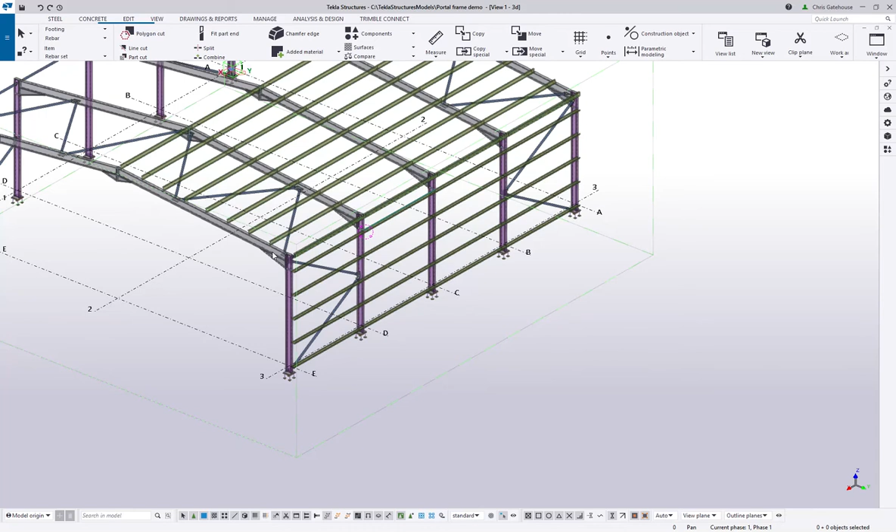When it comes to the cold roll components, I like to make life simple for myself. You'll remember that when we were doing the main portal spans, we detailed one bay and then copied them down. I like to do a similar thing with the purlins and the side rails.

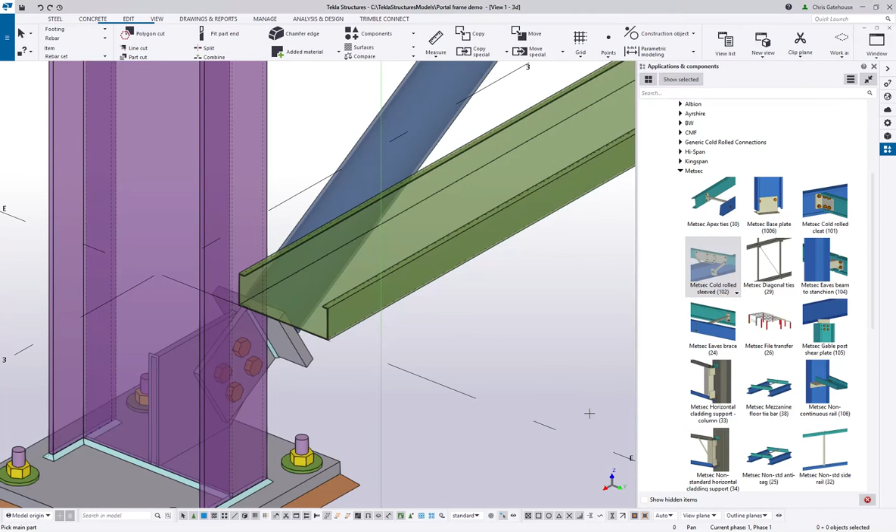So I will remove all but one row of the side rails, and just detail this one level. Go to the library, and under the steel specialized tools under cold roll systems, we have the Metsec library. There are a lot of other cold roll manufacturers available, so it's down to your preference, but they all behave in a very similar way. So we'll load in the default parameters for that component, pick the column, pick the rail, middle button to complete, and you can see we've got a cleat, a weld, all the sorts of things you expect to find with a component.

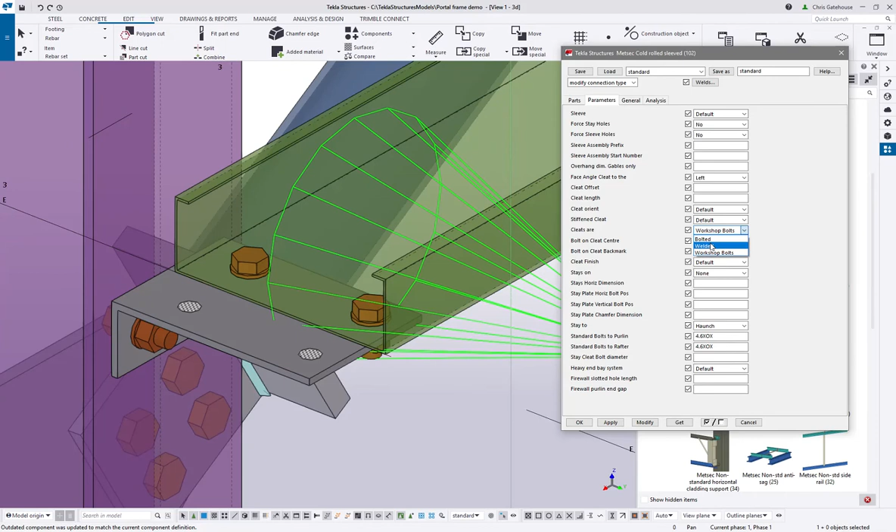If I double click here, it brings up the dialog box. The first thing is this cleat - you'll notice that's a Metsec off-the-shelf welded cleat. We can change those cleats to bolted, and you'll see we get a Metsec bolted type cleat. Or if we change it back to welded, we can change the profile. If you prefer to make your own cleats, if we change that specification to a 10 thick flat by 130 wide, we'll get a 10 by 130 flat. That's how I'm going to leave it, but how you make the cleats is up to you.

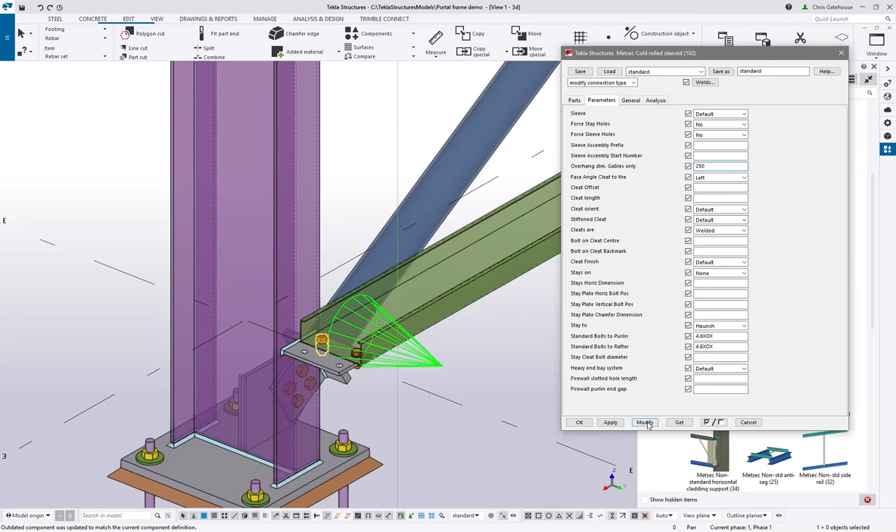The other thing you can do with the gable end is specify a gable end projection. So if we go into overhang dim gables only, specify a projection of 250 mil, that will project the end rails 250 past the center of the column. Now we can store that as our spec.

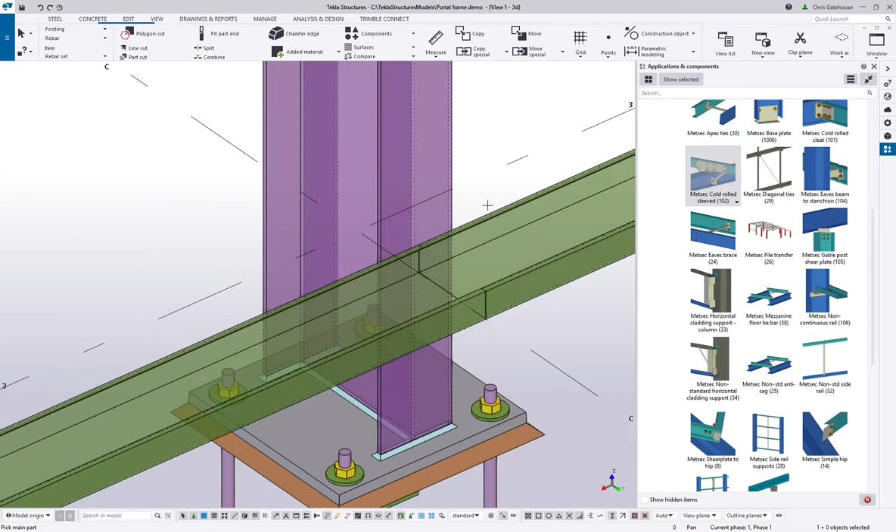We can go down this row of rails and put it in. You'll notice here that where I pick two rails, it's going to put the sleeve on automatically. These components tend to comply to manufacturer's literature as much as possible, so the fewer inputs you put into it, the better the results will be.

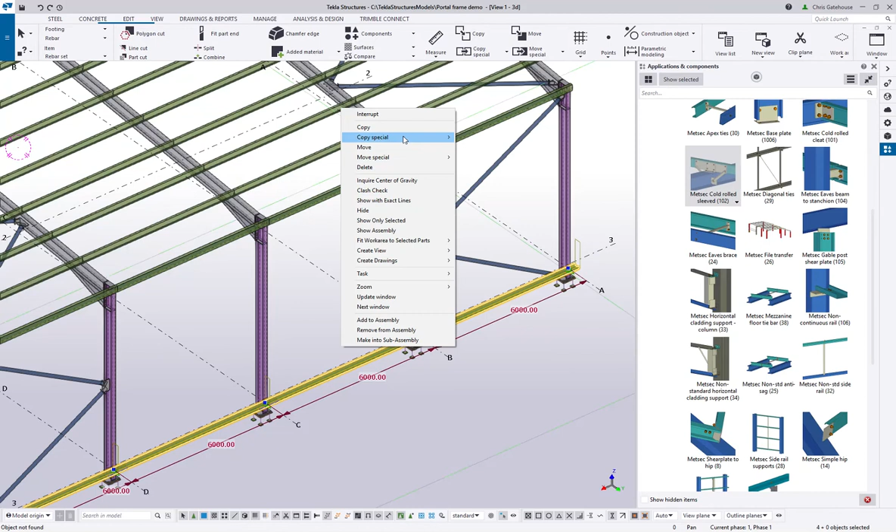So I'm just going to run down this elevation and complete those components. Again, you'll see the gable overhang has been detected, the 250 projection has been placed. I can select all those rails now that the connections are done, and use the copy special linear command, copy vertically 1500 spacing, 4 times. So that's that elevation of cold roll detailed.

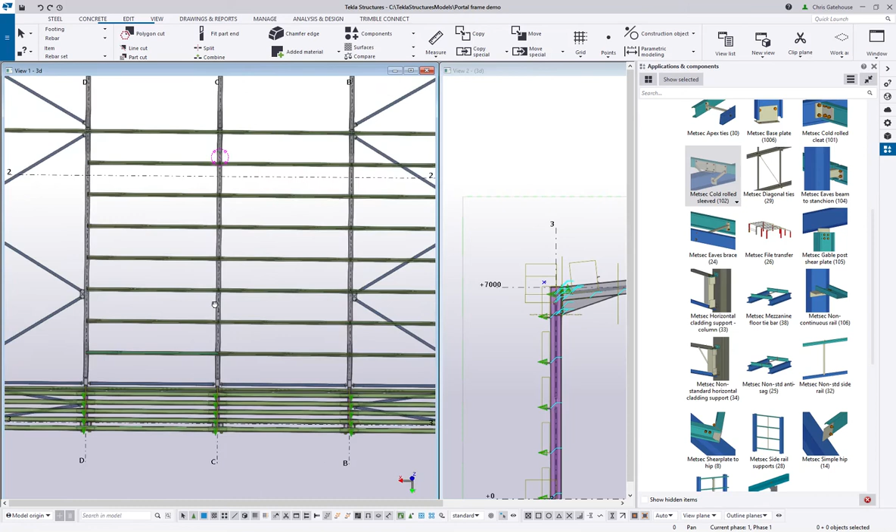Again, I can do the same thing with the purlins. So if I remove all the purlins and just leave one row - I can do it by window selection too, select all of those, delete them. So we've got one row of purlins. Let's detail those fully and then we can copy it down. We're just going to use the same component - it's a very versatile component for cold rolled.

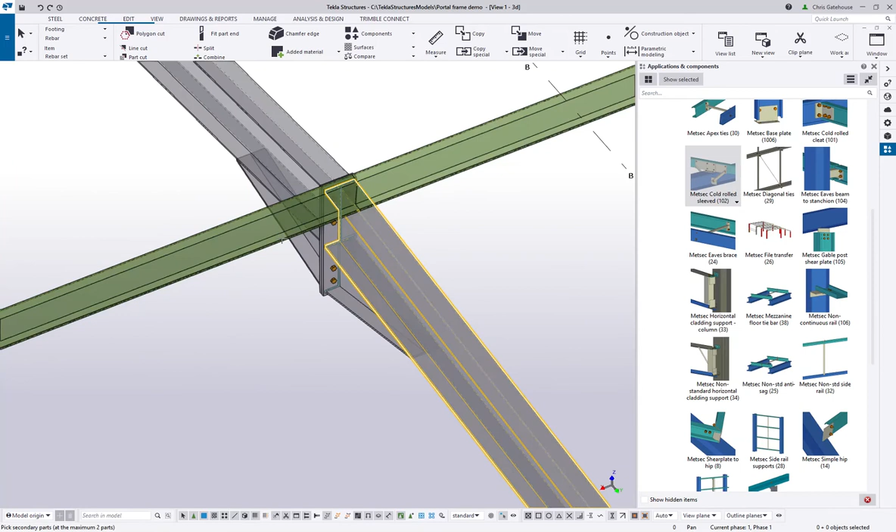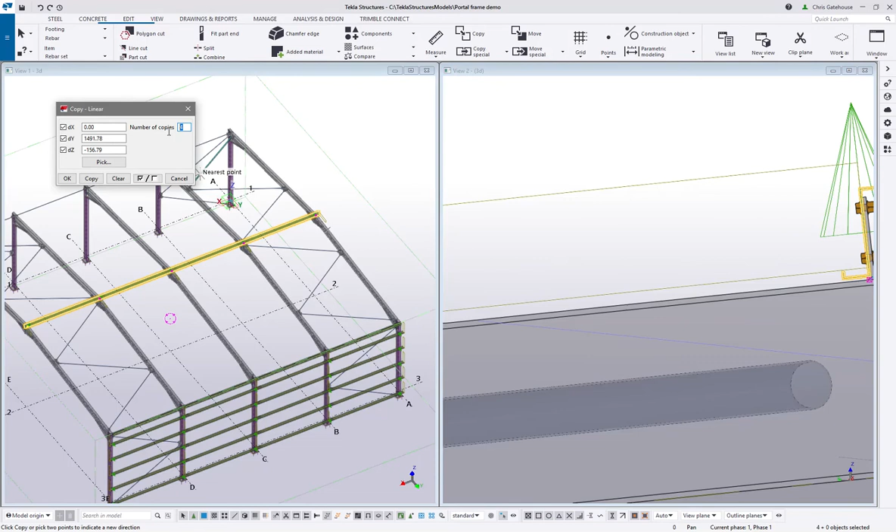There we go, you see the sleeve going in again. And then the gable. Again, I need to copy this back down the slope, so I'm going to select all 4 purlins. Copy special linear command, first point, then the vector, then the spacing - this time spacing was 1500, and this time I'm going to make 8 copies.

We've probably got one too many. So let's get rid of that row of purlins. Okay, wonderful - you can see we've got all of the connections.

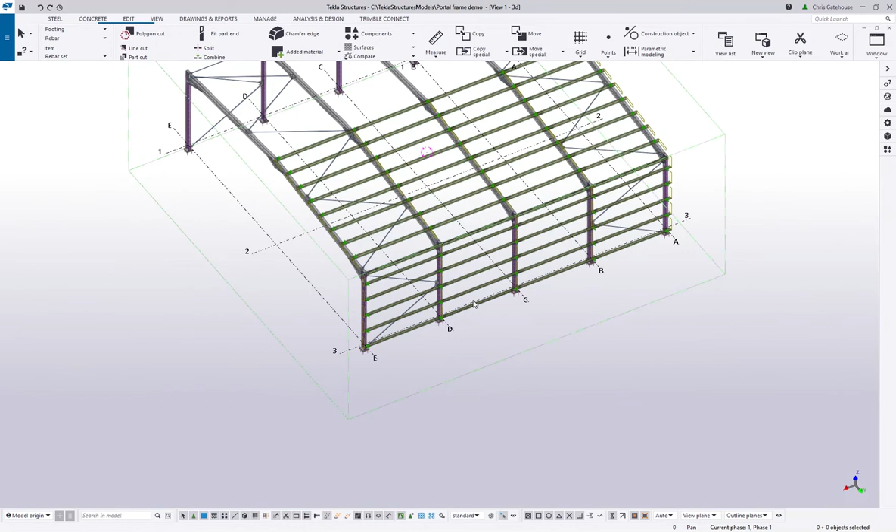Now, often with cold rolled systems, you'll need to brace them with stays. You can manage that within this component - again, sort of hinting at its flexibility, its versatility. So I can put stays on these components as well.

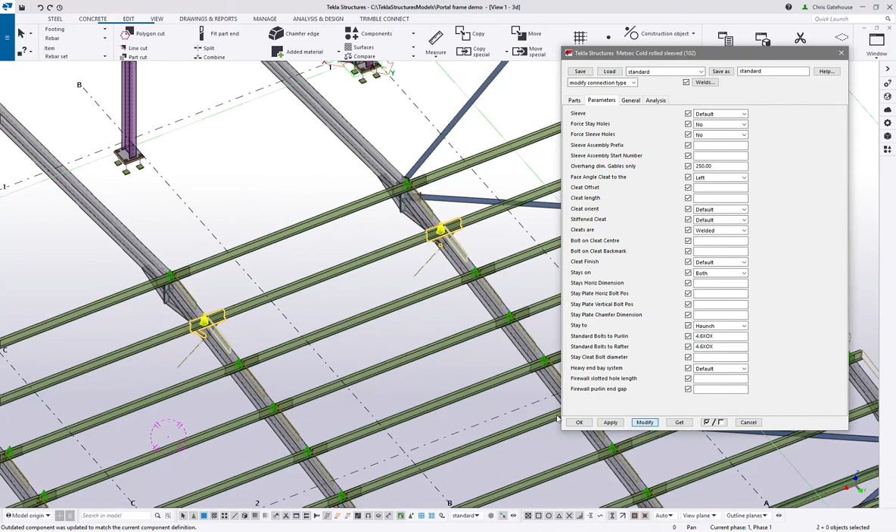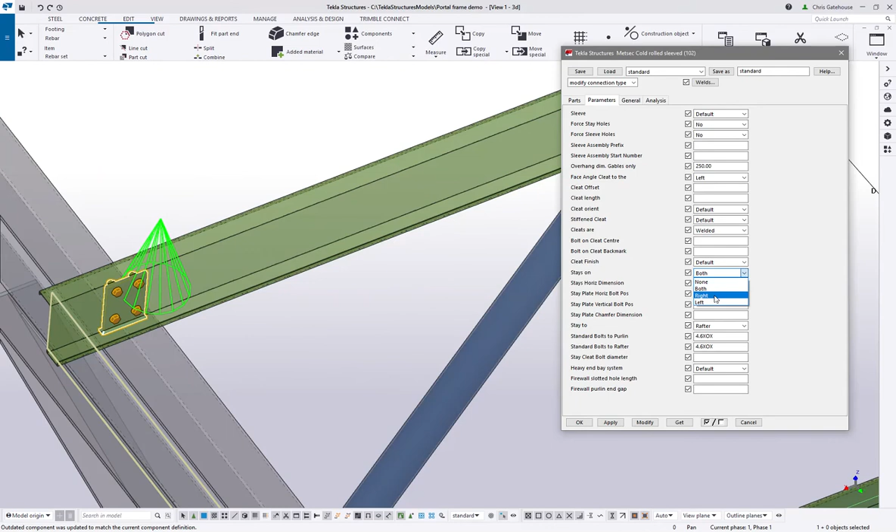I can just reproduce that down this row, and I can generally get them at the end of the haunch as well, so I can select those and do it there. That's going to the haunch by default, but I can change that so it goes to the rafter instead. We'll pop one on the end as well - that one is going on the left side. Is that going to the haunch or the rafter? No, the rafter, good. And then this one will be on the right hand side.

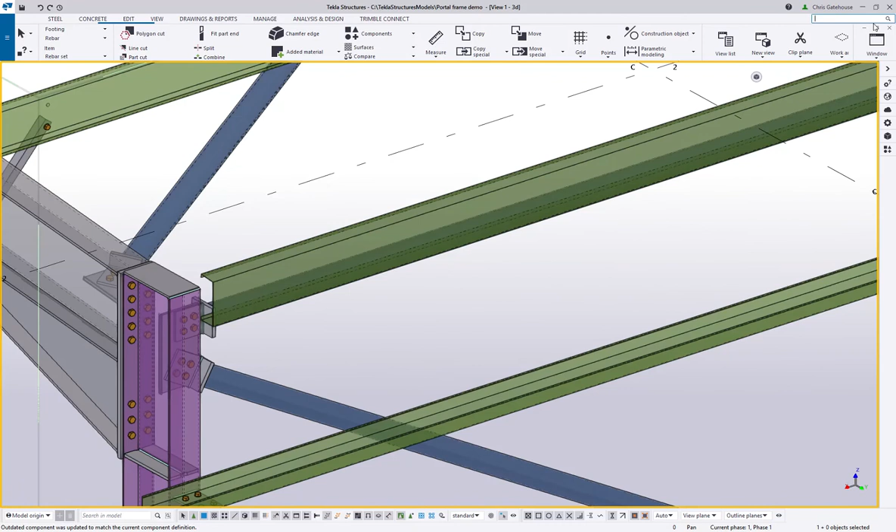Next, we will look at the eaves beams. As I said before, the column probably doesn't project enough to form a decent connection, so let's find which column that is.

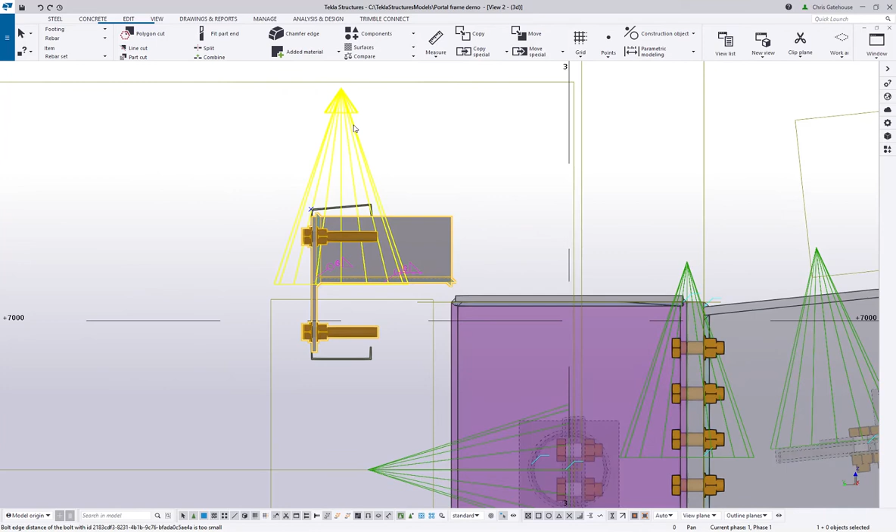Let's go to the component and form a Metsec eaves beam connection there. And you can see, yeah, as I suspected, it's not projecting up enough. So we can take care of that. First, let's configure this connection.

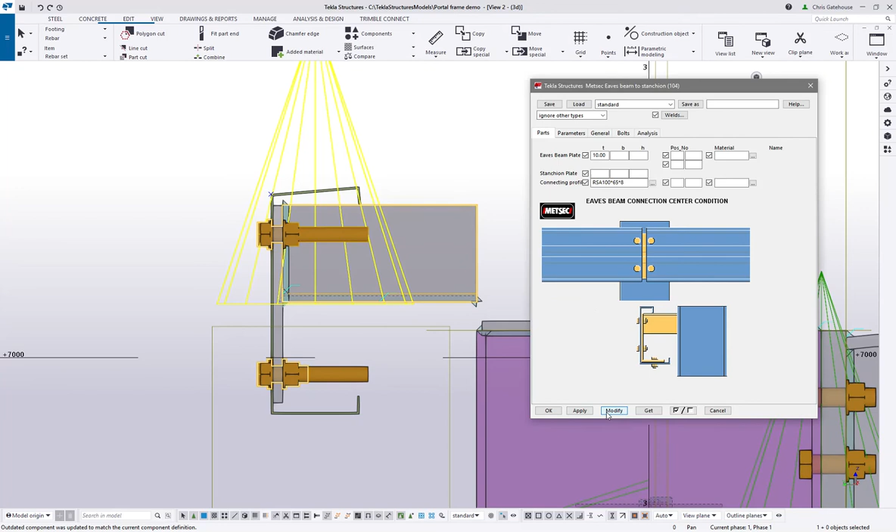So the eaves beam plate should be 10 thick. Let's go for that. The connecting profile we'll leave as an angle, but we can pick it out of the library, so let's go into our RSAs and say it's a 100 by 65 by 8 profile. Let's go to here, let's say that's okay, we're happy with that. Okay, that's fine. Yep, good with that, happy with all of that.

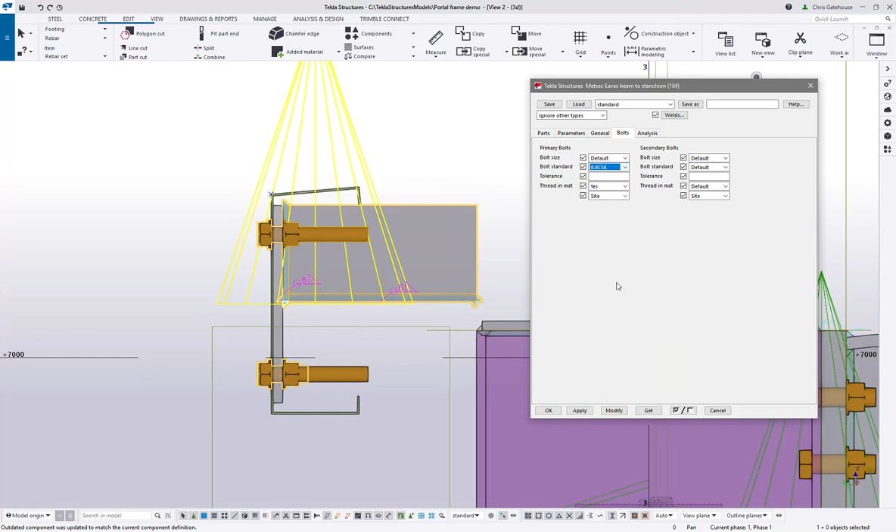Let's change the bolts to countersunk. So 8.8 countersunk bolts like so, and you'll see that the packer plate has been included automatically. Let's just take a 3D view of that. Now that leg passes over the leg, that's good.

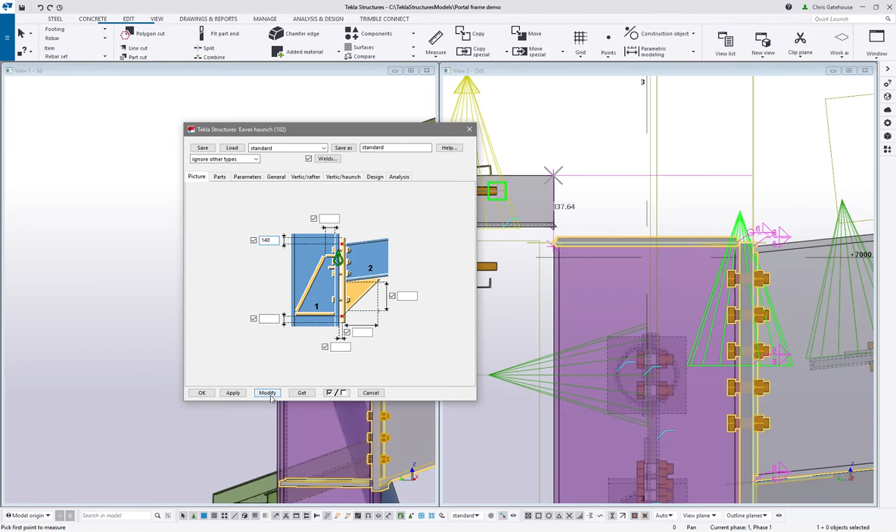So what we can do with this eaves component now to make the column projection suitable for the connection is project the top of the column above the rafter. If we take a quick measurement from there to the top of that, we can see that's 140 mil there or thereabouts, and we can project it above to make sure we've got enough profile to weld to.

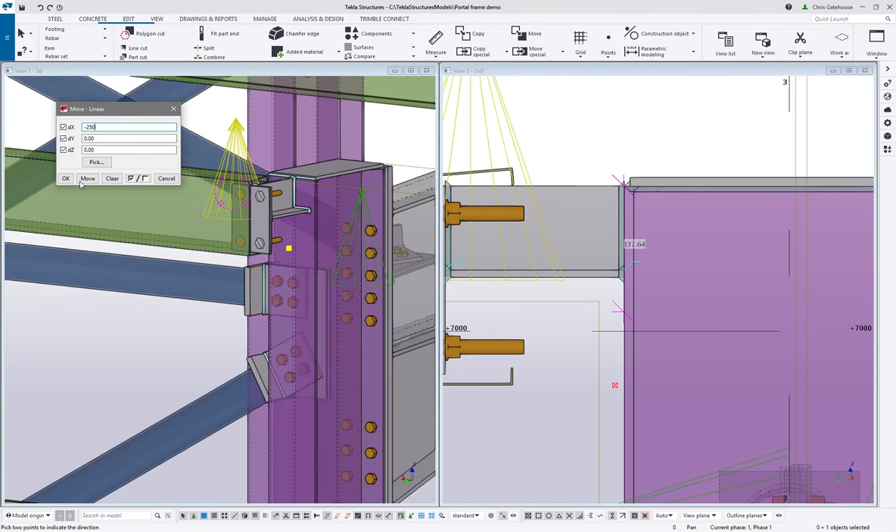The other thing we're missing here is the gable overhang, which you can't control within the component, but it's very straightforward. Take this point and we can move that in the X plane 250 mil out, like so, just to get that component to comply, and we'll move that other end 250 like so.

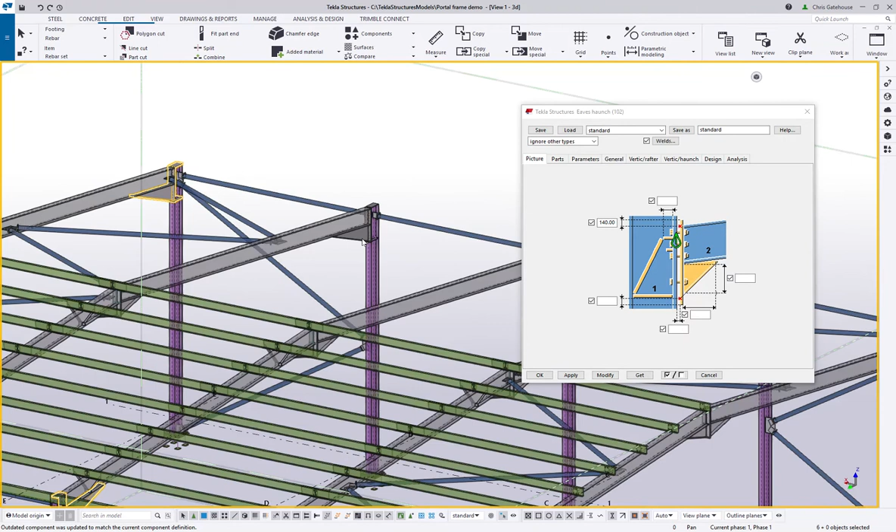Obviously we've got to project the rest of the columns up as well, so we can open that component and then go around and select each of these haunch connections like so, using the control command for multiple selection, and then simply modify, and then all the tops of the columns are projecting suitably.

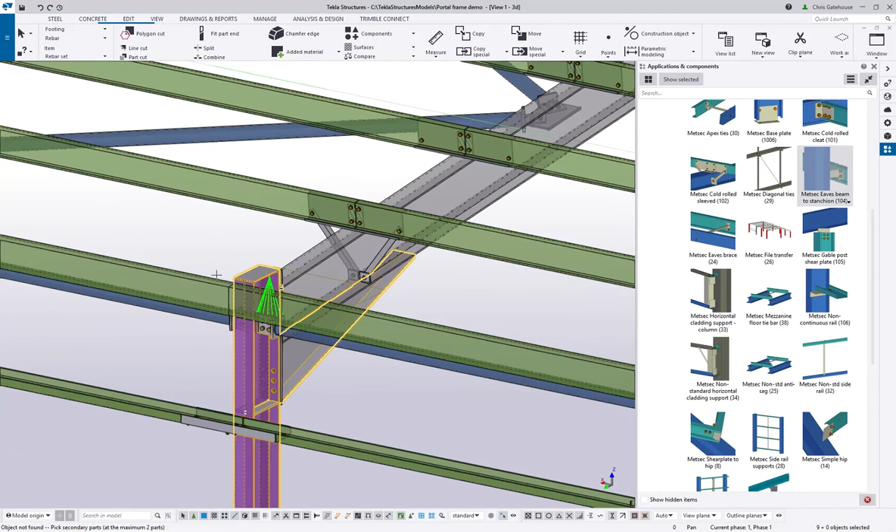And then back to the component, and then we can apply the rest of these Metsec connections, the eaves beam connections, like so. So column, eaves beam, column, eaves beam, and column, eaves beam. Okay.

Now, the final step in the cold roll system is to put in the anti-sag struts, and that again is very straightforward. So go to your component, your manufacturer's component library, and we'll do the side rails first. So we'll go for Metsec side rail support. Again, I don't need to tinker with this.

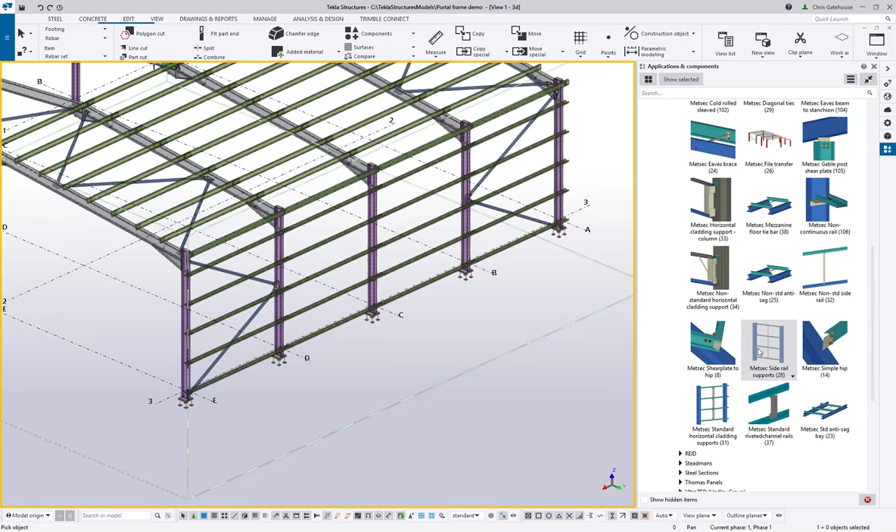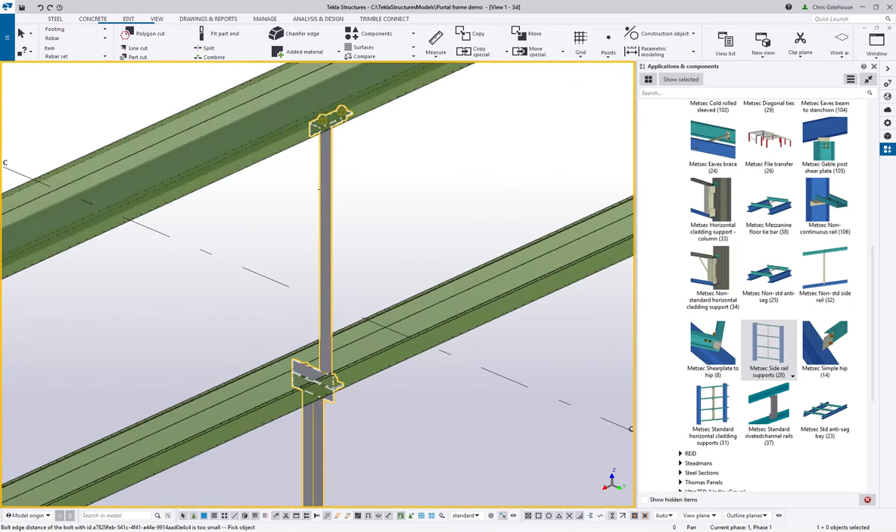I can just start the command, and you need to pick the two parts, the two main members dictating the span of the bay, and then the cold rolled members in that bay, middle button, and it will put in the appropriate components. So you can see we've got bolted side rail supports all the way up, and it's detecting there's an eaves beam, putting the appropriate strut in.

So this component will also detect the span. If this span is over 6 meters, it will put a double row in, again compliant with domestic standards. But we can force that - if we want the double struts, we can specify double struts. But I tend to leave it alone.

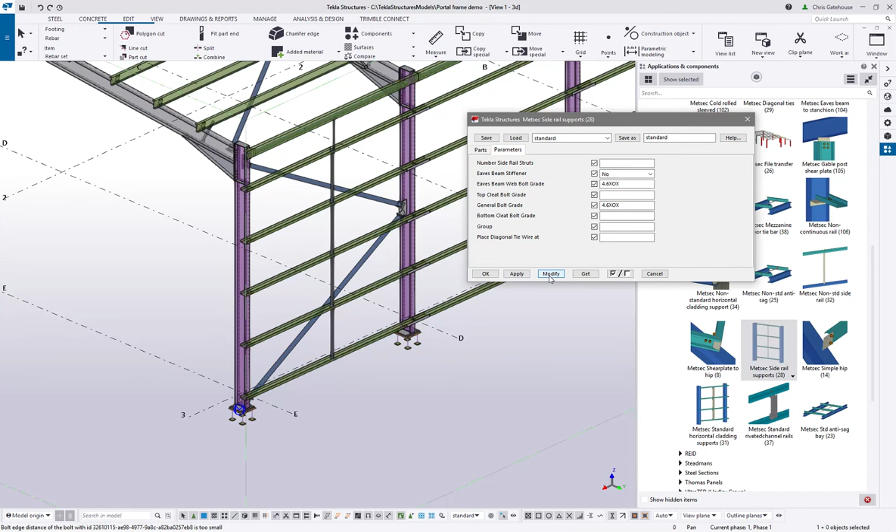We can also use this component to put the struts in, the diagonal tie wires by default. So if I say I want diagonal tie wires in bay 1, you can see bay 1 is the bottom bay, and that's put the struts in for me. Okay, so we'll leave it like so, and we'll just run down the rest of the building and complete that.

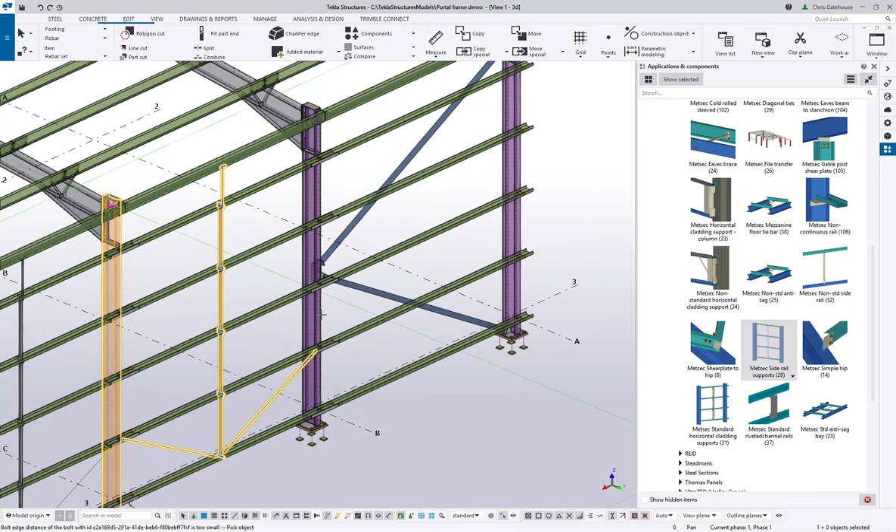So column, all of the side rail components completed. The purlins have their own component for this. So Metsec Std anti-sag bay for the purlins.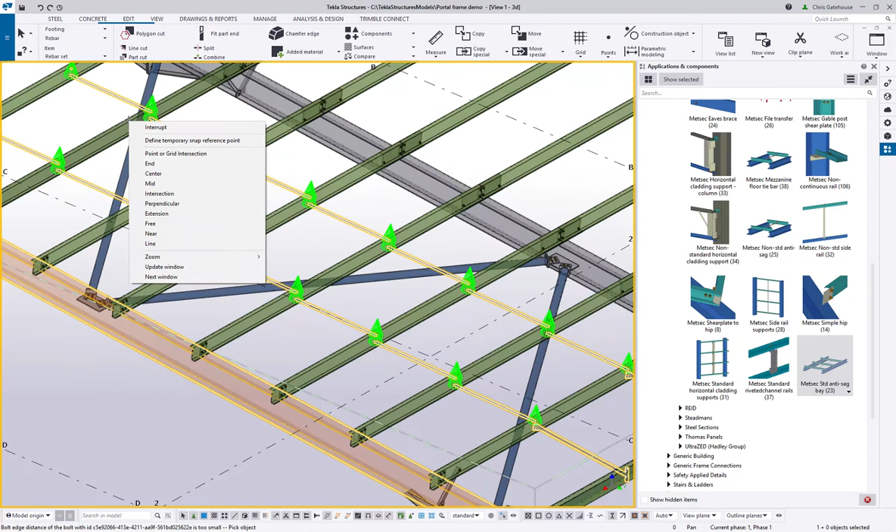Again, it works very similarly to the side rails. So pick the two rafters and then pick all of the purlin members, including the eaves beam for that bay. Middle button to complete. And this time we've got two rows with eaves struts down at the bottom.

Again, I can use this to place a diagonal tie wire at bay 2, so that's the second bay up, not including the eaves. And we'll leave it like so, leave it like that, that's good enough for me. So I'll just finish this off, go down the rest of the building and include those.

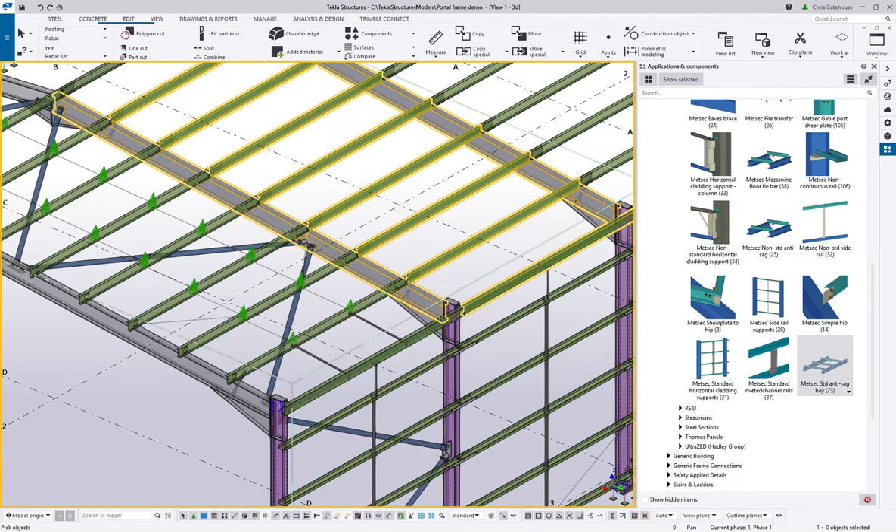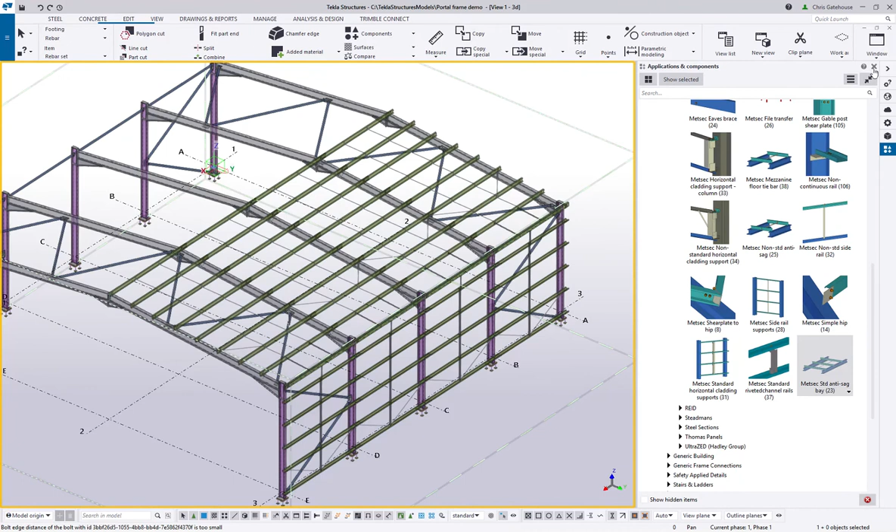Like so. Refresh the view, get rid of the top hats, and there we go. We've got our cold rolled system. So again, I can shortcut detailing of the other half of the building by taking a couple of seconds to select all of the main members in the cold rolled cladding support system.

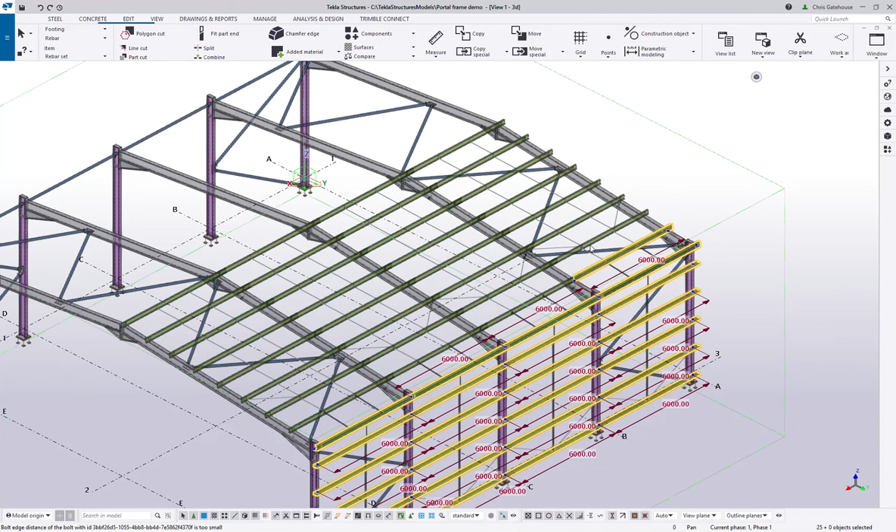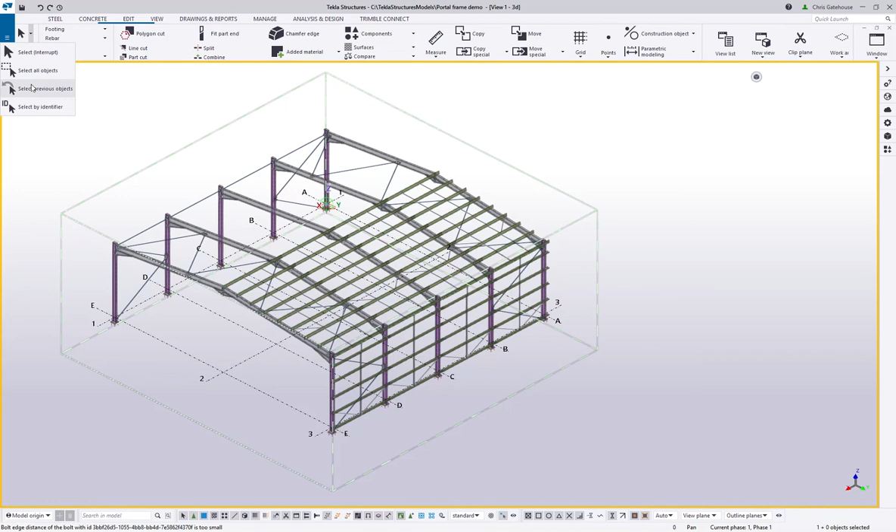And then the purlins, again using the control - well, that's unfortunate. However, we do have a tip for this. So if I use this select previous objects command, I can re-highlight everything that I just clicked on, which is very handy tool. There we go, shortcut all of that.

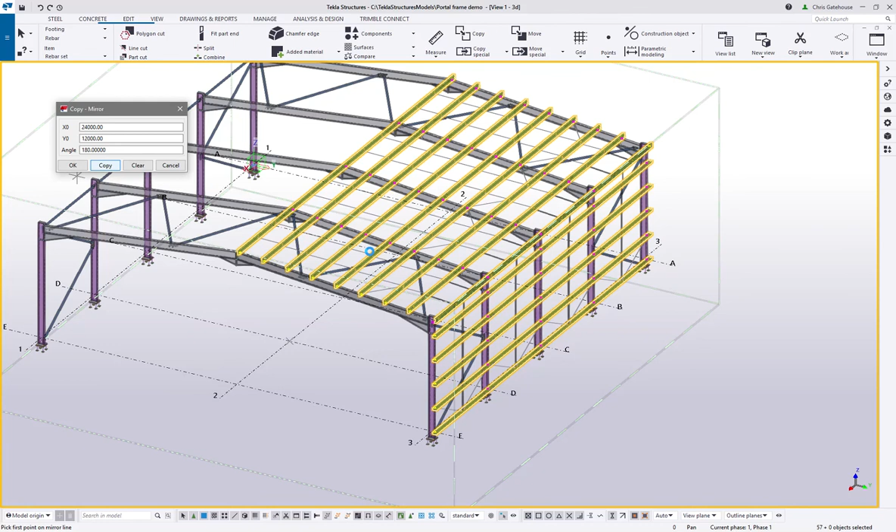See, even the professionals make mistakes. Now I can copy special, mirror that about the middle of the building, and then I've got all of my side rails and purlins on the other side of the building, and we'll let that finish like so. Okay, there we go, my completed building.